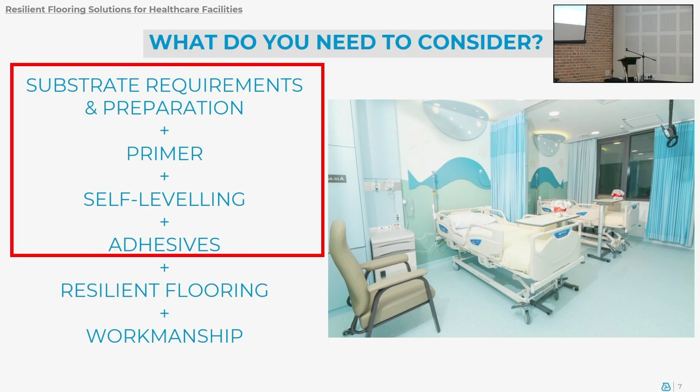Okay, what do we need to consider in order to deliver a sustainable, quality, safe and hygienic flooring system? We need to think about the substrate requirement, the preparation of the substrate, and a suitable primer is also needed - it's very important. The self-leveling compound is not just a layer of cementitious material, it's more than that - we will explain in more detail later in the presentation. And of course the adhesive - I will also spend some time explaining the importance of selecting a suitable adhesive, especially for hospital floors, later on. Finally, we'll talk about the resilient flooring, the vinyl flooring, and also the workmanship. But today's main topic will cover mostly the first four items: the substrate, the leveling compound, the adhesive, and the primer part.

When we talk about hospital floor, the resilient flooring for hospital floor is almost everywhere - it covers corridors, hospital beds, cafeteria, reception area, operation theater, etc. Which means to say, a good, quality, and performant floor is important for us. As I said, the hospital operates 24/7, there's no downtime allowed. If there are any defects or any delamination appearing on the flooring surface, that means we have to shut down that particular area, we have to repair it, and it will also raise concerns of hygiene and safety issues.

Okay, so now we talk about the substrate preparation and also the requirement.

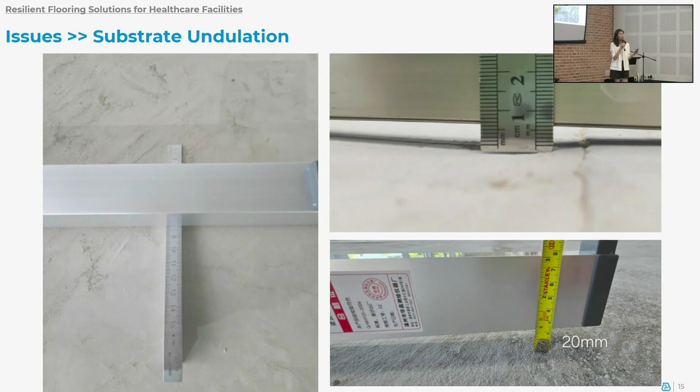Okay, this is the issue that's commonly seen at the job site. I think not only for hospital floors, the undulation of the substrate. Is that common to happen? Common, right? But we actually have a way to improve this issue.

Another issue, a weak substrate. Is that also common at all job sites, architects, consultant job sites? I see it every day. Not only for hospital floors, in some factory jobs, and also in shopping malls, commercial buildings, and it can be residential buildings as well, residential projects.

The third issue: when we apply the leveling compound on different types of substrate, we actually require different types of preparation and a suitable primer. But when we talk about hospital substrate, it's not always concrete substrate. Sometimes for some refurbishment projects, we apply the leveling compound on top of a tile surface. And I have come across some inquiries for hospital projects that actually wanted us to apply the leveling compound on a metal surface. Although this is not very easy or very common to see at the job site, it happens.

We also need to consider that when the substrate type is different, if we never take care about the preparation, never treat the existing substrate, for example tiles, accordingly, and we directly apply the vinyl on top, what will happen? You'll have a telegraphing effect, everything will reflect directly on the floor finishing. It doesn't look good. And it potentially entraps dirt and bacteria in the low spots area. So all these things are also very important for us.

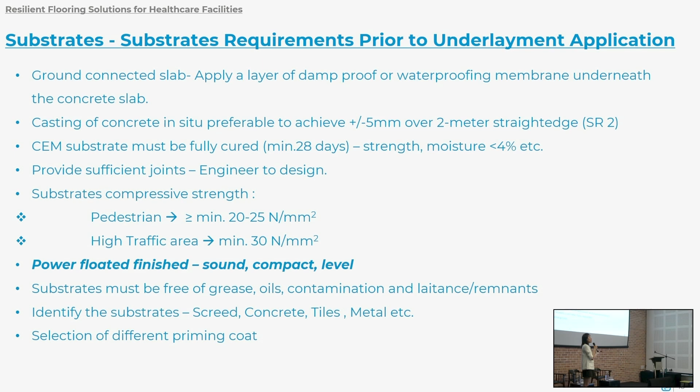And then finally, we need to identify the substrate. It's not always concrete, as I mentioned. Sometimes it can be metal, sometimes it can be tiles. So different types of substrate will need different types of substrate requirements and surface preparation. And of course, when there's a different type of substrate, we need to use different types of primer.

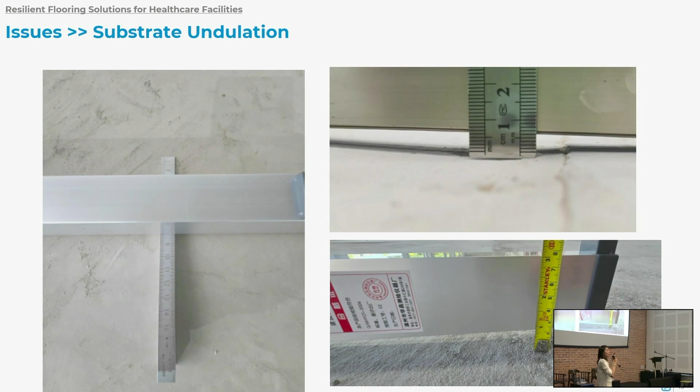So there's a way to rectify this issue. If we already know what this requirement will be, what we need, and it has to be done at the job site in order to deliver a good job. If there's any undulation issue, it can be avoided or improved by specifying the correct floor level. Okay, how about the weak substrate?

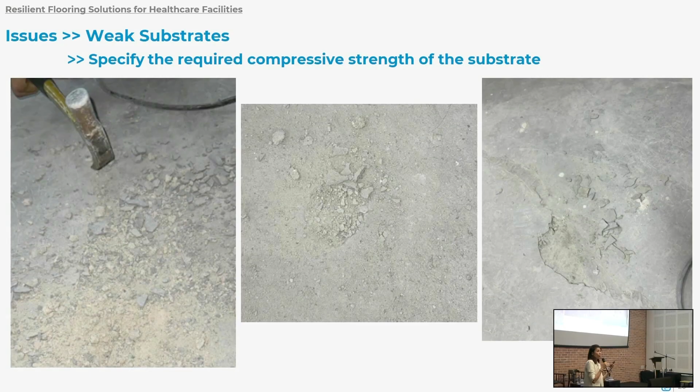Part of it can be workmanship, but I think the most important thing is we need to know the requirement for that hospital floor. Then only we can specify the requirement, the standard accordingly, and the applicator or the main contractor will deliver the job, the finishing, as per our requirement.

Oh, you're very smart, yeah?

It's actually because of the untreated substrate with high moisture content. I will keep repeating this moisture issue in my next few slides, so you have to bear it in mind and remember this. When we say high moisture, it means the moisture content is more than 4%. I will explain why in a later slide.

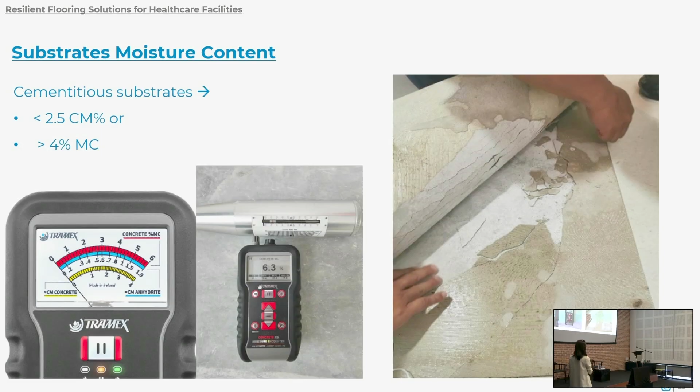This issue can be improved, or the chances of blistering happening at our job site can be reduced, by applying a layer of moisture reduction barrier. This is very important because I've seen a lot of hospital flooring using vinyl flooring on the ground bearing slab, but there's always a missing layer - the most important layer, the moisture reduction barrier.

You imagine, once we already move in, maybe the first week, second week, no issue. But once the moisture pressure accumulates to a certain strength, when it's strong enough to push away the vinyl, we can see this. But by the time you identify this issue, you've already moved in, the hospital is already operating. What we need to do is shut down that particular area, and most of the time we don't have that luxury of time. So this layer is very important, especially for hospitals.

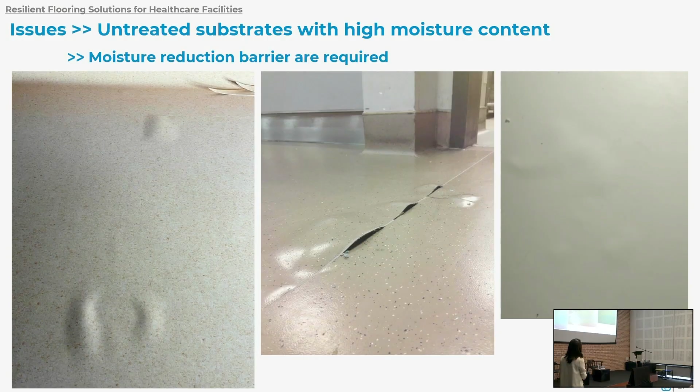Now we move to the leveling compound layer. As I mentioned in the first few slides, the leveling compound layer is more than just a cementitious layer - it's not just a material that resurfaces or improves the undulation of the existing substrate in order to receive the vinyl. There's a lot of things we need to consider when we select or specify a product, because there's a lot of things related to the durability of the flooring system, the hygiene, and also the safety.

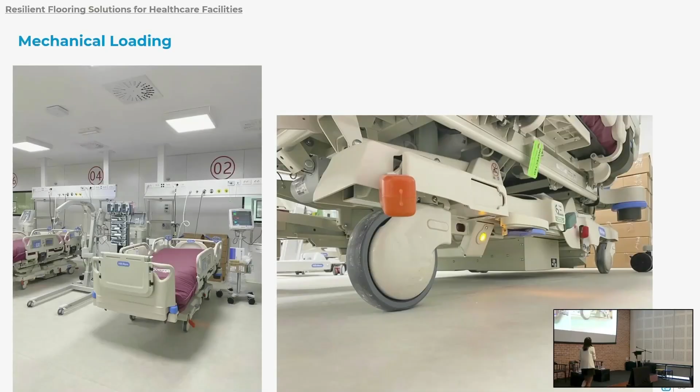This is actually very dangerous, especially for hospital patients and medical staff who always walk on the resilient flooring surface, or when pushing medical equipment over this bumpy area - it can be very dangerous. Also, the hospital bed is always subject to all this mechanical loading.

So these are the criteria we need to consider when selecting an appropriate hospital underlayment material. I'll go through them one by one. The first one is mechanical performance - you have to recognize this logo, compliance with the standard EN 13813. I'll explain more details in the next two slides. Also, we need to consider the thickness.

Sometimes my client will tell me they need a floor that can achieve 5mm, 7mm thickness, or top up the leveling compound to 10mm thickness. So we need to consider that, because for different types of thickness you want to top up, there are different types of leveling compound that need to be used.

Also, the waiting time before laying the flooring - as I said, they are short of time, everything needs to be fast, so you have to consider the waiting time before bonding. For fast track projects, you need a more fast curing material instead of the standard leveling compound. Also, suitability for underfloor heating systems, though this is not common in Malaysia. And fiber reinforcement is also not common at our job sites in Malaysia, but in some European countries they use this when they need to apply a thick layer of underlayment material, so reinforcement material is added to increase the strength of the material.

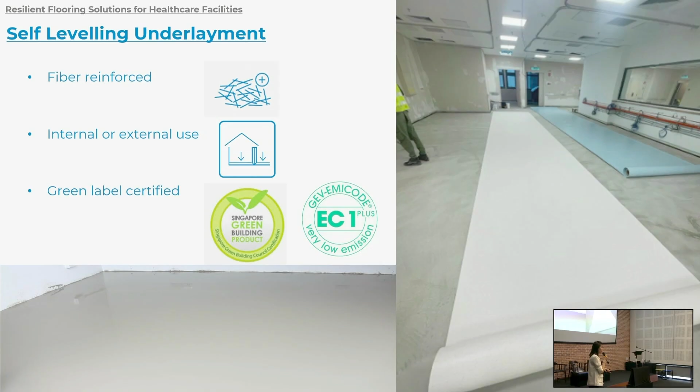So you see, a simple layer of cementitious material actually has a lot of factors we need to consider before selecting the appropriate material to apply at the job site. Now, if you still remember this logo, the standard EN 13813 - this logo is very important for me, as it can become one of the selection criteria when we need to select the suitable self-leveling compound to apply at the job site.

Why? CT - what is CT? CT represents a cementitious material. And here, C25 - can you guess what C25 means?

Yes. Do you have any gift for this very smart person? Joseph, she always answers the right question, yeah.

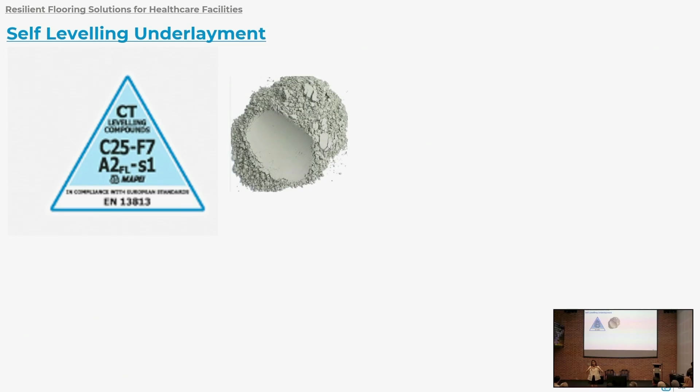C25 means grade 25, okay? And what is F7? Just guess, so that you all won't fall asleep. I know it's very difficult to attend the product talk in the early morning, especially on Saturday. Same goes to me. What is F7? Just guess. Flexural strength. Flexural strength refers to the maximum bending of the material before it breaks. So when I show F7, it means that the flexural strength is 7, okay?

A2. Anyone know, or you only know A4, A4 paper? A2 is actually a fire rating classification. When we say A1, A2 in Euro class, it means this is a non-combustible material. Non-combustible means this material will not burn, it will not spread fire, it won't catch fire as well. Is that important? A non-combustible material to be applied at the hospital floor is very important. Do you have any idea what are the examples of non-combustible material? Cementitious material, concrete, steel, for example, okay?

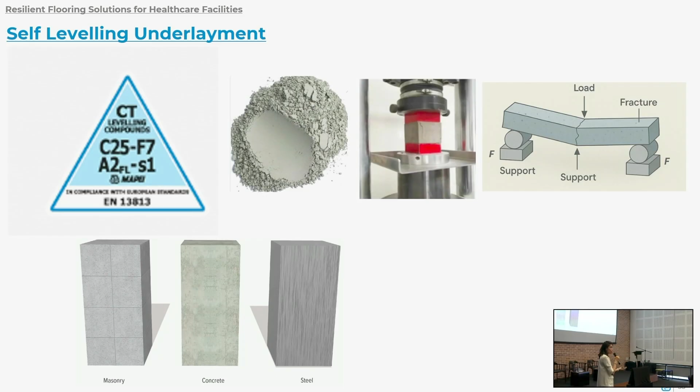FL is referred to the flooring material. S1, when I say this is non-combustible, S1 refers to S for smoke. S1 is referred to low smoke production. This is also very important. I realize that most of the time when we are selecting a material like the leveling compound, we just think it's just a leveling compound, a layer of cement, but it's more than this layer, more than a leveling compound. It gives you a green certification, it gives you strength, it gives you flexural strength, and it is a non-combustible material with very low smoke production.

Okay, so this is about the EN standard 13813. So if all these issues happen that we can see at our job site, it can be improved by using a high mechanical strength self-leveling underlayment material.

Okay, and now we will move to the adhesive layer. Adhesive layer is also something that I think, I have a feeling, maybe I'm wrong, that most of the consultants, the hospital owner, even the hospital operator, are not really concerned about this layer. For them, adhesive is just the adhesive, right? Nothing special, nothing fantastic about this material. The message I would like to pass here today is the adhesive is not just a simple adhesive. There's a lot of things, a lot of selection criteria, a lot of factors that we need to consider.

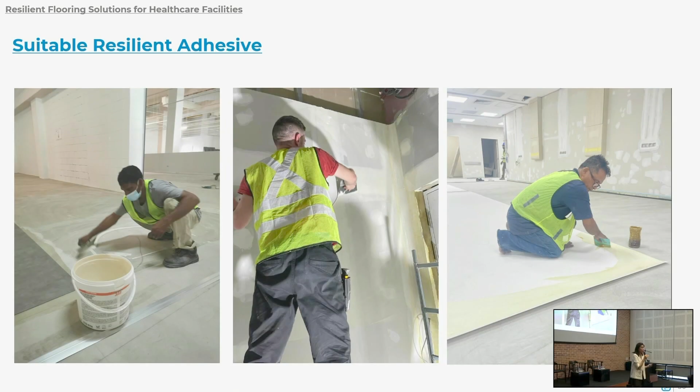In order to ensure that we are providing quality air to the hospital patient, we are providing material that is compliant to a lot of ISO standards. I'm going to explain it later. And also in order to provide a more healthy environment, not only to the patient but also to the medical staff, because they are the ones who always work there, right? Okay.

When we talk about adhesive, as I said, there are three components that I feel are very important. This is the performance test of the adhesive material, that it has to be compliant to the ISO standard 22631. So in terms of these three tests - dimensional stability, peel strength, shear strength - maybe some of the operators or clients feel like this is not related to them. They just need a layer of adhesive that is able to adhere to the substrate, that's it. But there's a lot of things we need to know about this test, then only we know why we need to select adhesive that complies to these three ISO standards.

Okay, the first one is dimensional stability. Dimensional stability for the adhesive material is very, very important. Why? Because a material that is dimensional stability approved, or passes the test, means the adhesive is able to withstand or hold the vinyl in shape without changing shape. This is very related to the job site condition. Imagine the hospital floor, the air conditioning is always turned on, very cold most of the time. But in some areas like windows, corridors, or the entrance area, it will be subjected to sunlight as well, right?

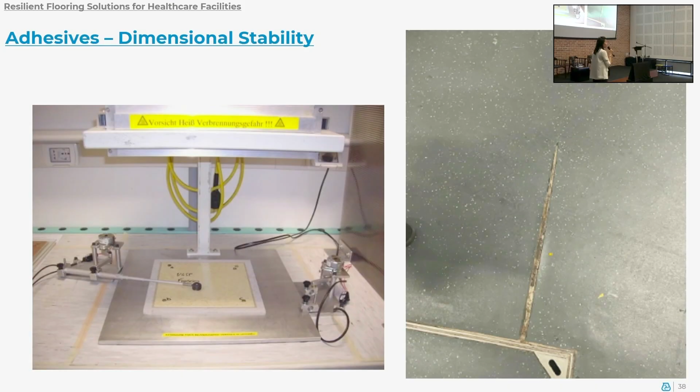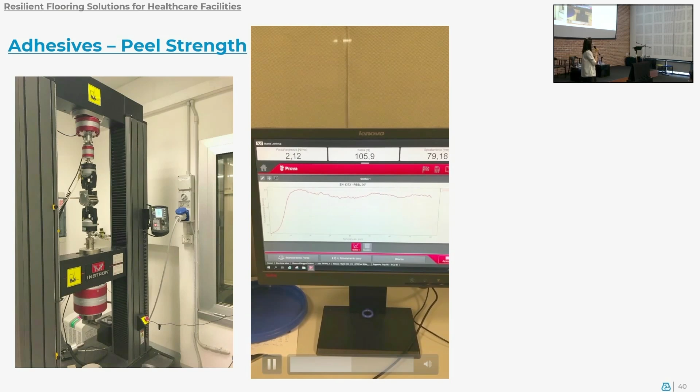The worst case scenario is if the adhesive we are selecting does not pass this test, meaning you see cohesive failure. What is cohesive failure? Cohesive failure is a failure that breaks in between the adhesive itself. This is something very bad, meaning the adhesive is not strong enough.

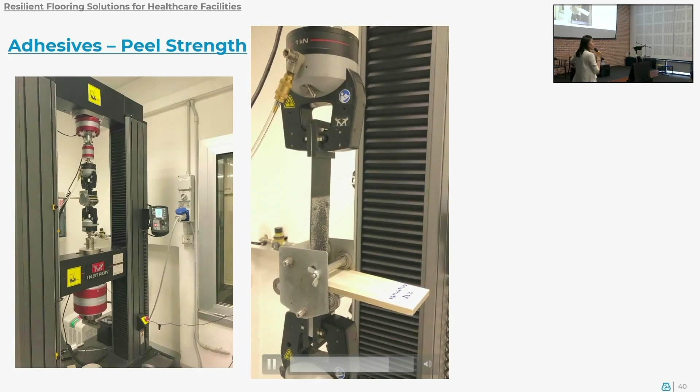So this is how the test is conducted. You see they will pull and they will also measure the maximum tensile force that it is able to take. Is this related to hospital flooring? Related, right?

For example, today when the hospital cleaners are doing cleaning, especially on the edges, that is always the weak point. If there's multiple times of cleaning, pushing, and we have a chance to lift up the material, if the material we are using is not good in terms of peel strength, the edges will potentially curl up. And this is also dangerous because people might trip and fall down on the curled up area.

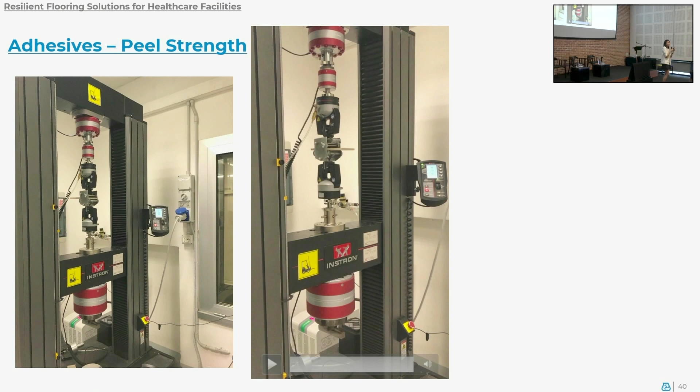Okay, so this is also related to us. And now we move to the last test, which is about shear strength. Shear strength is to actually test the force that the material is able to withstand to hold in a parallel direction, or sideways, meaning front and back or left and right. We call this sideway, and this is also very common to see at hospital flooring.

Imagine today we are pushing hospital equipment. Sometimes they run fast and maybe there's someone in front of them, so they have to stop immediately, pull back and pull out. So front and back, this is because of sideway force. So when the adhesive is not good in terms of shear strength, after multiple times of pulling sideway force...

Potentially, it will give way. Then the vinyl flooring, what will happen if you have a sliding effect? This is actually also very dangerous. Imagine in a hospital, everyone is in a hurry, everything is urgent, they need it fast, they need to settle it fast.

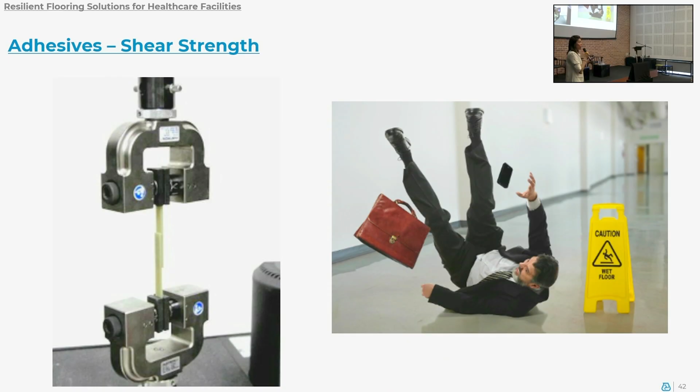So when you are trying to run, the vinyl flooring could already give way and fall down, so it's also very dangerous. Material that actually passes the shear strength test is important as well. This ISO standard is one of the selection criteria for the adhesive, to ensure the performance or mechanical property of the adhesive is there.

Now, from the adhesive layer, we also need to talk about the GBI building - we have an expert here, so I will just cover the product. When we say VOC, this is very important, especially nowadays as we look for more sustainable buildings, and also very important for hospital projects. I will explain the definition of VOC when we talk about VOC emission and VOC content - that's a difference.

Here is the definition of VOC emission. VOC emission is the volatile organic compound that is released by the product into the air. This is measured in the emission chamber, compliant to ISO standard 16000 Parts 3, 6, 9 and EN standard 16516. The measurement unit is microgram per cubic meter, because we are talking about release into the environment - we test everything in the emission chamber.

So when we talk about VOC emission, we always like to relate this to the EC1 Plus standard. This is a European standard, but I think it's important - EMICODE material certified for low emission, EC1 Plus is actually very low emission. Meaning, it doesn't mean totally zero VOC. There's still some VOC content in the environment, in the air, but very, very little. I will show you the table later.

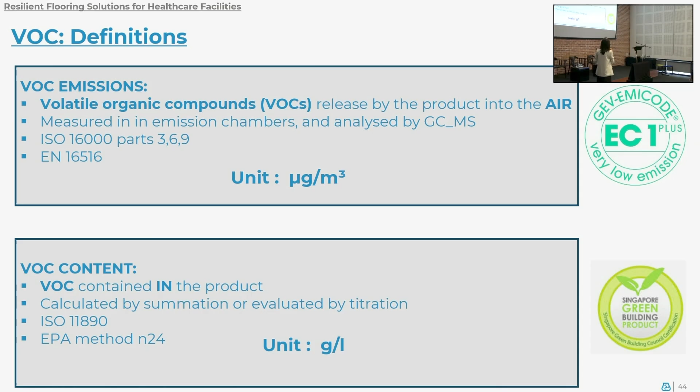Now we move to VOC content. When we talk about VOC content, we're talking about the content inside the product itself. The first one is talking about air quality, the second one talking about VOC inside the product. It's actually evaluated by titration, compliant to ISO and EPA methods. The measurement unit is gram per liter. This is very related to Singapore Green Building Product - one of the testing criteria for Singapore Green Building Product is about the VOC content inside the product itself.

Now we talk about the VOC emission comparison. Why do I need to show this table? Because I feel like I don't know whether all the architects here realize that at the job site, hospital job site, a lot of applicators use solvented adhesive. A lot of time when we visited the job site, it immediately gives a very strong smell, even when they are applying vinyl flooring material - they still use solvent material.

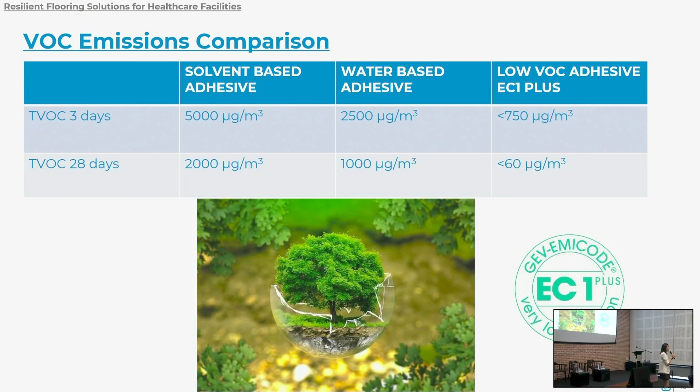We can show you the test report normally, because if the manufacturer is able to show you that their adhesive complies to this test, they need to show the test report as well. So we have to always identify this logo, not the Singapore Green Building material, but this EC1 Plus import logo. I realize that sometimes when we try to show this test certificate to the consultant, they are not too interested when I mention about this. But in fact, the VOC emission in the air is very important, so I think we have to always think about this certification.

No, it's a European standard. But for some manufacturers, they not only send the product for the EC1 Plus test, they also send the product for green certification. So we have both, which I think will be even safer for the hospital project, right?

To which ISO? I think Malaysia standard, right? Based on what we have dealt with the architect in the past, they prefer to have a Singapore green label as compared to the EC1 Plus standard.

To the green, right? SIRIM is totally not related to green, because for SIRIM cert, normally what we do is send the product for performance test. It can be a lot, for example leveling compound - it can be compressive strength for the first 28 days. So it is not related to green, yeah.

I'm not sure, I think we can check with the expert later, the next speaker. I'm not a certified person to talk about this topic, sorry, but we can discuss later if you have any input from the next speaker, yeah?

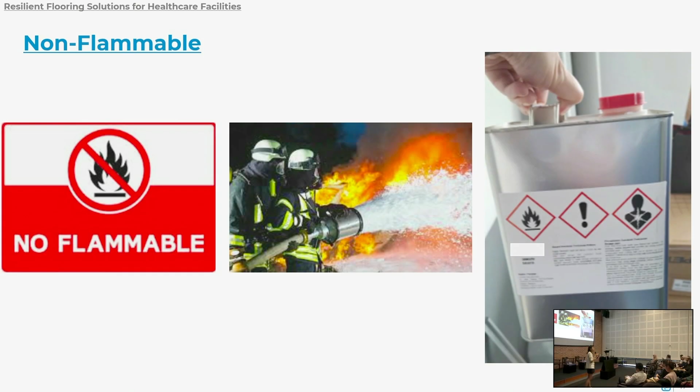Okay, so I'm coming to my conclusion. I think I'm on time, a bit earlier. There are 4 key factors for a more hygienic, durable, safe hospital floor. For me, there are 4 key important factors. The first factor is the substrate condition. As I mentioned, substrate is everything, the foundation of everything. So we need to make sure we specify the correct material at the job site, the correct specification, then only the applicator or main contractor is able to deliver as per the requirement.

And the environment factor I'm actually referring to is not only a low VOC emission environment, because we need a very hygienic and very safe environment. I also refer to the job site condition. For example, today, if we need to construct a clinic, not to say a hospital, at Genting Highland.

So at Genting Highland, all of us know that the relative humidity is very high. In that kind of situation, the curing duration of the leveling compound will be much slower. But do we need to rush to complete the project? My answer is no.

Because today we always talk about hygienic, durable, and safe hospital flooring, we still need to allow the proper curing duration for the leveling compound or the concrete substrate in order to allow the material to achieve the ultimate strength, then only we can proceed to the next layer. So if there's an environment factor that's hard for us to control, I know, but we're not supposed to be in a hurry to complete the project without considering a durable and more sustainable flooring system, okay?

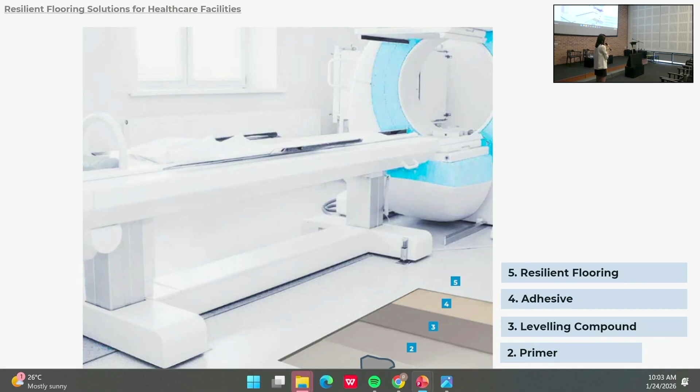Okay, we talk about the repair method. There's some issues commonly seen at the job site, like cracks - cracks less than 0.3mm, and surface cracks within 0.3 to 1mm. All this can be repaired using this product called Planiprep SC. This is a product that can repair from feather edge to maximum 5mm, pre-packed in 5kg or 4.5kg per bag, so very easy to carry and bring to the job site.

But the message here is not just the product. The message is if we are able to identify any defects on the floor substrate, we need to repair it accordingly. It's very common that they don't have this practice at the job site, but all this imperfection on the substrate will definitely reflect into the leveling compound layer, and finally it will appear on the vinyl flooring layer.

Okay, this is about crack. And low spot, also common, right? We also can repair it using the same product called Planiprep SC - anything less than 5mm until feather edge. Feather edge means almost without thickness, scratch to zero. We still can use this product to repair it accordingly.

And if you are able to identify some localized repair that's in between 5mm to 10mm thickness, very common also, we can use a patch repair mortar called Mapegrout Patch 218. This is a fiber reinforcement patch repair mortar, a very thixotropic material, okay?

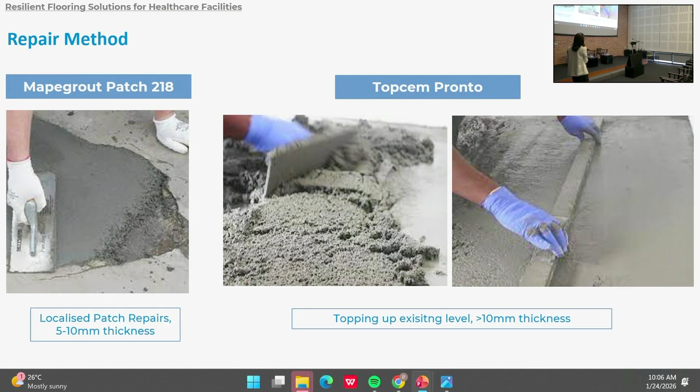But in some cases, we talk about different types of substrate, right? We need to use different primer. If today we are dealing with a substrate that's a tile surface, we cannot use Primer G anymore because Primer G is a one component resin-based primer, only can be applied on all cementitious substrate. If today we have to deal with tile finishing, what we need to do is use a more high performance primer - I would like to introduce this primer, which is a universal acrylic primer for all absorbent and non-absorbent substrate.

So one example for non-absorbent substrate would be tiles. So normally what we recommend for tile surface, you still need to dry it, because some tiles we have seen at the site have a layer of very glossy, oily surface. We cannot apply the primer on that kind of finishing - we have to remove it using a grinding method, or you can use caustic acid to actually remove the glossy and oily surface.

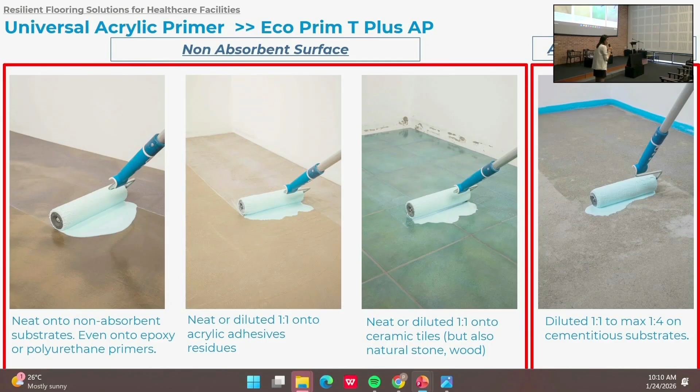When I talk about this universal primer EcoPrim T Plus AP, why do we call it a universal primer? Because it can be applied on all non-absorbent substrates. It can be applied on existing epoxy or polyurethane primer - on that surface it can become a primer. It can also be applied on existing acrylic adhesive residue - this is common for renovation work. And it can also be applied on ceramic tiles and stone surfaces. So all this we call non-absorbent surface. It can also be applied on absorbent substrate as well, such as normal cementitious substrate. That's why we call this a universal primer.

Now we move to moisture. If the substrate moisture is more than 4%, we need to apply a layer of moisture reduction barrier, and this is the suitable product. The product name is called Planiseal VS MY. This is a 2-component solvent-free epoxy, 100% solid content. The material viscosity is very good, meaning it is able to penetrate into the concrete substrate very well.

This will be the layering - typically we require 2 layers. The first layer is very important because at 0.4 kg per meter square, it will act as a moisture reduction barrier. Anything we apply cannot be lesser than 0.4 - it has to be minimum 0.4. The second layer is actually a bonding layer in order to allow the leveling compound to be bonded on top of this material.

This is how we conducted the test for this moisture reduction barrier, and this is an important test as well, compliant to the standard ASTM E96. This is a standard test method for water vapor transmission of material. Why is this test important?

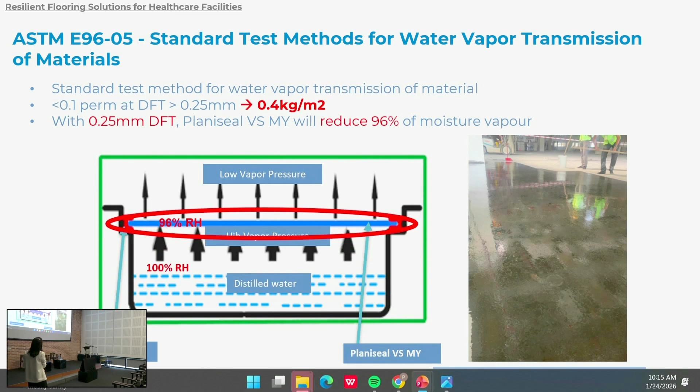Okay, and we come to the self-leveling underlayment. For hospital flooring, I will always propose Ultraplan Contract. Reason being, this is a very high compressive strength material. After 28 days, we can achieve 32 Newton. And this is also a product that complies to the standard EN 13813.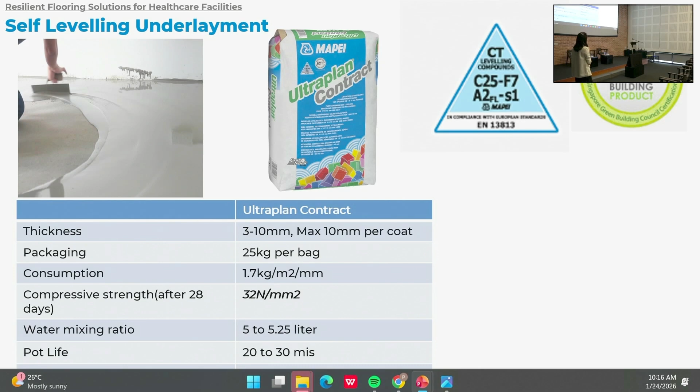I don't want to explain everything in detail since it was already presented earlier. This is also a product certified by Singapore Green Building Product, and of course compliant to EMICODE EC1+, which is the low VOC emission standard. And finally there's the serum test. So this is about the leveling compound.

And we talked about the adhesive. As I said, in the market or at the job site, even for hospital projects, we always see a lot of solvent-based adhesive being used, and sometimes also alkaline-based adhesive.

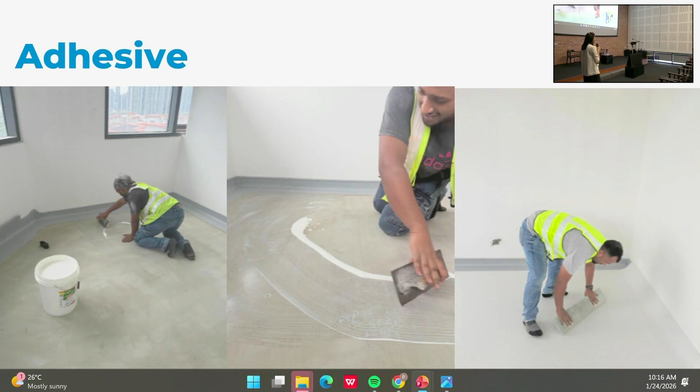So the adhesive I'm going to introduce is Ultra Bond Eco V4 Universal. This is also a universal adhesive. When I say universal, it has multiple usages. The universal meaning, other than referring to the high performance of the material, also refers to the application of this adhesive, meaning it can apply to all types of vinyl flooring - vinyl roll, vinyl plank, rubber flooring, linoleum, etc.

The important tests I mentioned - dimensional stability, peel strength test, shear strength test - all pass. We have extended open time and fast initial tack, which benefits the worker because they have more adjustment time. There are also two different packagings, and it's ready for use after a minimum of 24 to 48 hours.

This is a product that is solvent-free, low odor, and also very low emission, compliant to the EC1 plus standard for low VOC emission. It's also certified for Singapore Green Building Product, and of course non-flammable. There's also the serum test. So this is the universal adhesive that I refer to.

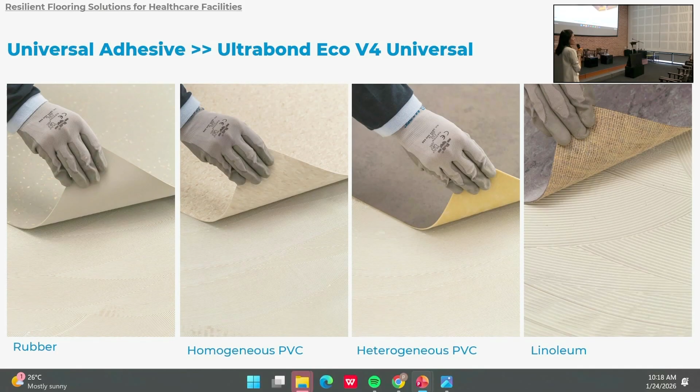As I said, it can be used to bond rubber, homogeneous PVC, heterogeneous PVC, linoleum, and all the vinyl flooring, resilient flooring you can think of. So yeah, this is about the application of the universal adhesive at the hospital job site.

I have a project here that I would like to share. It's a case study about Sunway Medical Hospital. It might be a project some of the architects attending today's presentation are familiar with. Sunway Medical Hospital is one of the very famous, very well-known hospitals in Malaysia.

Actually, not only in Malaysia - they also attract a lot of medical tourism, with people coming to Malaysia for treatment or healthcare screening because of the very good facilities, and there are many Sunway hospitals in Malaysia, not only in Kuala Lumpur. This is the #1 hospital in Malaysia, and we started our project with Sunway Medical Group - our first project, Sunway Medical in Sunway City.

So I remember we started this project right after COVID time, because of the shortage in hospital beds - even now, not just a few years back, there's still a lot of shortage. So they extended the existing building with another tower, Tower D and E. That was back in 2023.

Okay, that's the first project that we started with Sunway, and during that time we were only able to supply our primer and the leveling compound, Ultraplan contract only. But in the later part, we also explored more with this client, and they also used the same system for the Penang project, Sunway Hospital Penang, because they had a good experience with us for this Sunway City project.

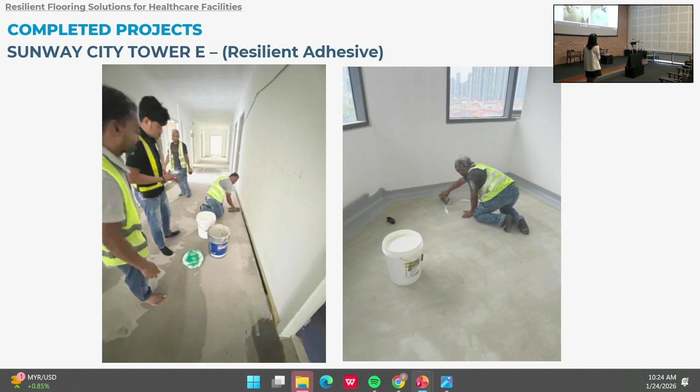Okay, and what we also did, we also tried to propose our resilient adhesive into the same project, Tower E. So this is basically a low VOC EC1 plus adhesive called Ultra Bond Eco V4 Universal.

Okay, so some project references just to show here. Sunway Velocity, we have Penang, we have Damansara, Perak, a lot of nice photos. But I think today what we're concerned with is not the nice photo, not the nice finishing of the flooring material. We are more concerned about the performance of the flooring system, because everything needs to tie back to the durability of the flooring system. It has to be hygienic enough to allow the patient or medical staff to work on top, and it has to be safe for everyone.

In order to provide a complete system and a more durable system solution, our solution will always be a complete system from the primer, the repair, the moisture reduction barrier, Ultra Plan contract, the leveling compound, and also the universal adhesive until the final floor finishing.

Our solution is not only for healthcare facilities. For commercial projects or office areas, we also have a complete system solution, starting from the primer, the repair, the screeding layer, the fast curing screed, the universal primer EcoPrim T Plus AP, the high performance self-leveling compound Ultra Plan. This is Ultra Bond Eco TXAU, a carpet tackifier, followed finally by the carpet tiles. So everything is important, every layer is very important in order to ensure we have a good floor finishing.

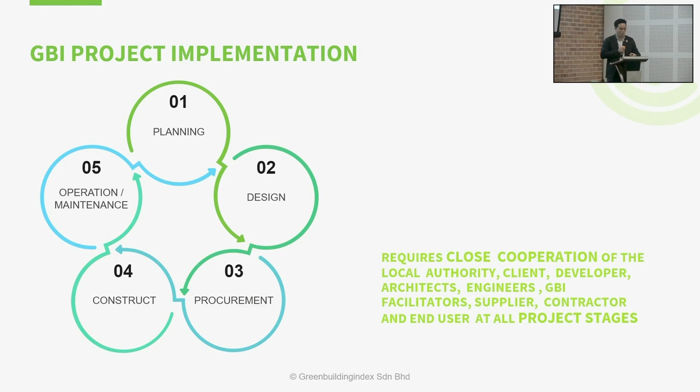Meaning that once you get the CVA, the Certificate of Verification for the building, it needs to be recertified every 3 years. So you have to go through an audit process, and this forces the building owner and facility manager to look into how to maintain their building to the standard of the rating they have gained. So let's say you gain a platinum rating under GBI, you have to work very hard to maintain that rating for the next audit when they go for the RVA after 3 years.

So when we developed this tool, it's developed with the Ministry of Health, and under the Ministry of Health there's Healthcare Technical Services, and together with ACEM, our Association of Consulting Engineers Malaysia, and PAM, these two organizations are the owners of the Green Building Index. We have developed various tools, and the hospital tool is one of them, which we have developed with the Ministry of Health.

As PAM members, your feedback is valuable. So if you are doing a hospital project and you feel that the tool needs to be updated, or there are things that you would like to feedback to GBI, we are willing to take your feedback and see how we can improve the tool together.

Last Friday, I attended a meeting with the developers of the NRNC tool. This is the main tool in GBI, non-residential new construction, and it's going to be updated soon, but we are looking at how it can benefit the industry as a whole, where you can maintain the carrot aspect of it, but update the tool so that what has previously been the carrot now has become the stick. It's part of the law.

So we are giving points for things which are already in the law. For example, MS 1525 is already codified in the law under your UBBL 2012 and then the recent 2021 amendment. So that shouldn't be something which you get more points for, because it's already the baseline. But we want to encourage a holistic overview or review of the tool so that we can move the industry forward to achieve better standards of buildings.

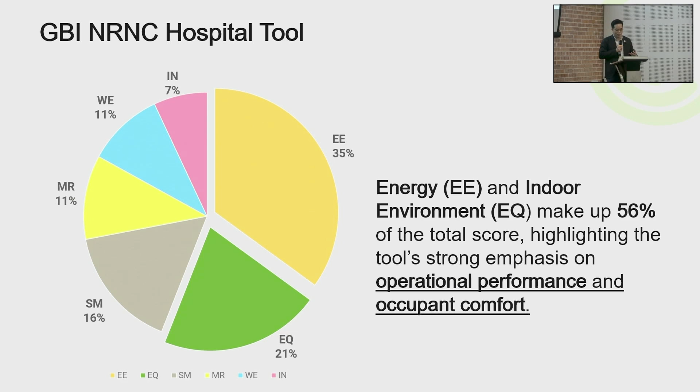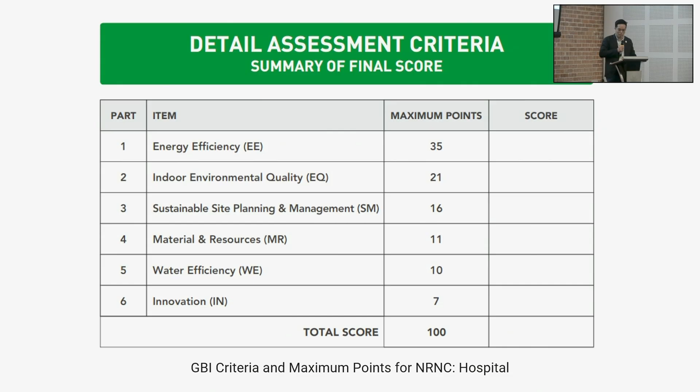This is where you see the criteria in the sheets. You can actually download this from the GBI website and get acquainted with it. The difference here between the NRNC tool for offices, which is the base tool, and the hospital tool is, say, in EE5, for example, there's advanced performance.

For hospitals, they don't operate 9 to 5 like offices do. They actually operate 24 hours. So there is a different criteria for hospitals, where the top tier of the BEI is 90 kilowatt hours per meter per year for the NRNC tool. For the hospital tool, you look at general areas and clinical areas. So the baseline is much higher because of the different operating hours.

Water efficiency for hospitals, we are looking at how you can treat clinical processed water for hemodialysis, for sterilization and things like that, and how the water can be reused from the cooling towers.

So when you look at material resourcing, earlier we had a presentation by MAPEI, so we have a lot of standards with regards to VOCs, how the VOCs are treated in hospitals, so that patients, like immunocompromised patients, do not have to suffer from the odors or the off-gassing of all these materials. So that's a much stricter compliance required for hospitals.

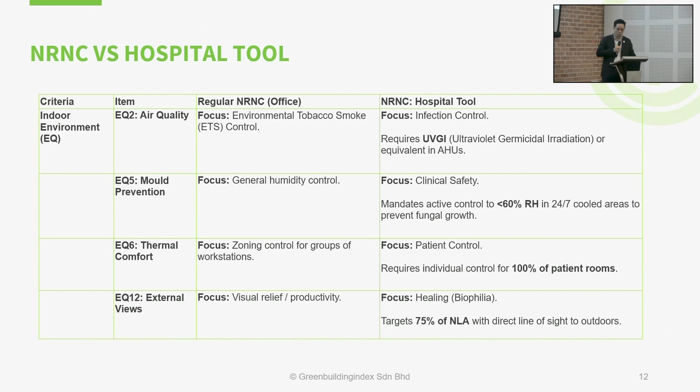So this is the highlight of where the differences lie between the base NRNC tool and the hospital tool. Then we look at this EE5 aspect on energy efficiency.

So now we'll talk about application of the GBI tool, but I'll take off my GBI hat and speak about this as a director of PAB.

Our office, as you all know, PAB has been around for quite a long time, 52 years now. In the last few years, we decided that we want to pursue a mission of creating healthier ecologies, or crafting or designing healthier ecologies, and we want to do this through genuine transdisciplinary design.

I got this term from my wife. She's a speech therapist, and what happened was, when she was studying at UCL, the UK practice is for speech therapists, occupational therapists, and psychologists to go around assessing the patients together, and then they are able to give a very holistic solution to the patient's needs.

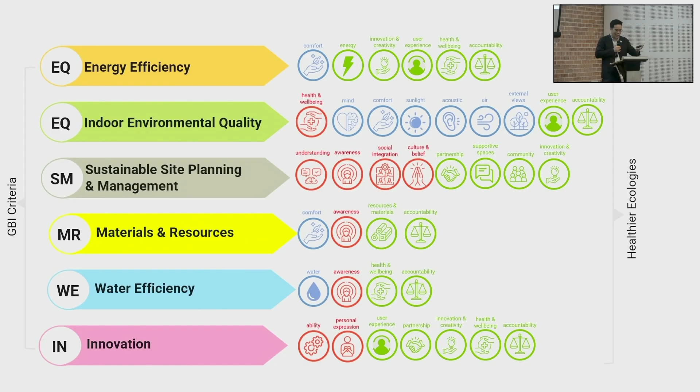So when we chart this against the GBI criteria, you can see this is something which we need to, as all practitioners, look at - how we can design better, create better facilities, and incorporate things which will benefit our clients and the users that actually use the spaces we design.

So GBI, the first GBI Platinum Hospital, the only one at the moment, is Hospital Cyberjaya. This is a public hospital, government hospital, but it was not initiated by the MOH. It was actually something initiated by the MOF through CyberView. Part of the brief requirements was to achieve GBI Platinum at that time.

I think not many were convinced about why we need to go for GBI Platinum, but having gone through the process and after 3 years of operations, I think even the operators whom I met on Wednesday really do appreciate that it was done that way, and the benefits really - they're proud of the hospital and the environment they're working in. So it's paid off in dividends quite a lot after 3 years.

So this was the criteria we used. We scored 86 out of 100 points. As you can see here, not very clear, I'll use the next chart. So the points which we didn't score - I mean, almost all of the energy efficiency points we scored, less of the EQ points, almost all the site and materials, site management points we scored, material resources points, almost all we scored.

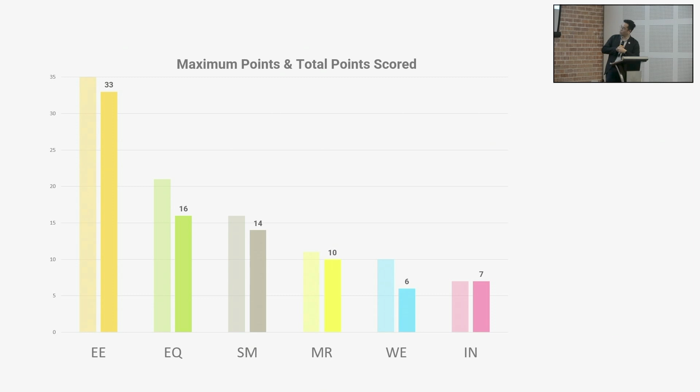Water - because we didn't recycle the water, I mean CK can talk about it later, we didn't recycle parts of the water that's used within the hospital, we didn't score much of this. By innovation, we scored full points.

So when we looked at the hospital design - okay, when you look at the hospital design, we looked at how we can create a memorable and high visual presence for the hospital. So the internal joke in the office is this is the most orange and the most green hospital in Malaysia. This orange is the bright color that was the theme chosen by the KKM.

Healing architecture - we are looking at the complete facilities for a general hospital. It's 288 beds, and it has to be future-centric, so there's room for expansion and adaptability in the future, and also meeting the platinum criteria for GBI.

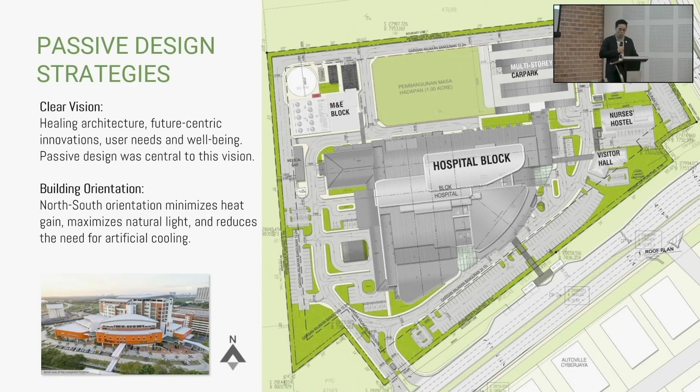So we have to start with passive design first. I think all of you are very familiar with this - having north-south orientation when you're doing the planning, having all the other ancillary facilities planned in a way which supports the hospital in the most efficient manner possible, having the visual presence to the road - the master planning aspects have to be resolved convincingly. And next, you look at how the layout is thought of as different mini blocks within a larger envelope, and then the main area would be the atrium where all the hospital streets will converge.

And then you look at how you can do the roofing with high solar reflectivity. White was chosen as the color, so you reflect most of the sunlight or solar heat gain from the roof. And then looking at how we can optimize the placement and sizing of windows, window to wall ratios, so that you can optimize the performance of the building envelope.

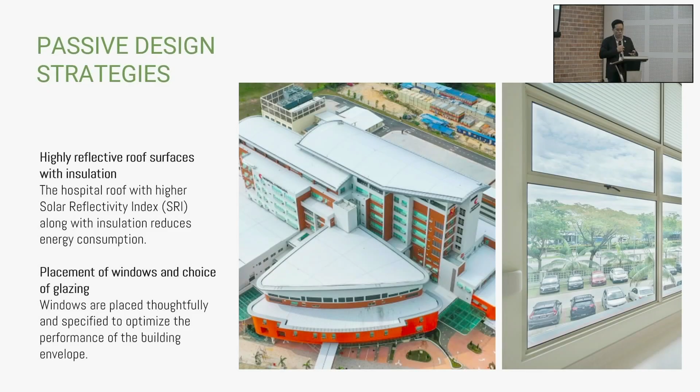So this is the scope of the architect working together with the medical planner to see how we can use this efficiently. As I said earlier about this atrium, it's a very nice space to be in, because it's where all the hospital streets cross, so if you're working or a patient of the hospital, you have to enter through this main area and walk past it many times throughout the day.

This helps with your circadian rhythm, because if you are in an enclosed environment with artificial light over a long period of time, you lose track of whether it's raining outside, whether it's night or day. So this provides a lot of relief to everyone who uses the hospital, and it's not air conditioned. It's naturally ventilated plus cool air spilling out from air conditioned spaces, so it's quite comfortable to be in this space.

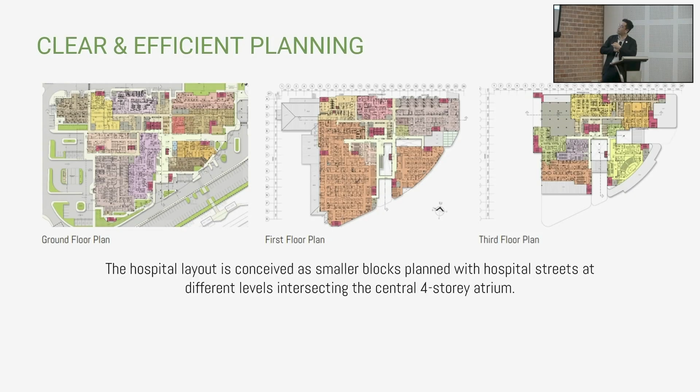Clear and efficient planning - it's a vision where all the circulation converges here. On other floors you can see the bridges across the space, so you have that crisscrossing. And also at the end of corridors, it's not a dark corridor.

At the end of corridors you have a window, some sort of waiting area, a seating area with a view of the outdoors. So it's a short corridor, then you have something at the end with seating. It's very different from most public hospitals we are used to, and it's done in a way that optimizes the planning in exposing patients or users to natural light and views of the outdoors as much as possible, where possible.

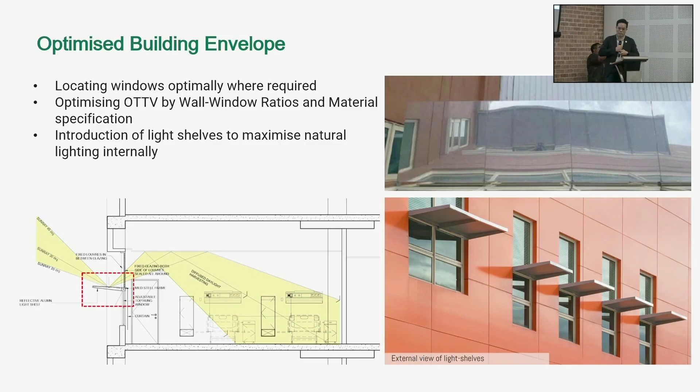Something CK encouraged us to do was test this idea of light shelves, whether or not they work. At first I think we were skeptical, but having implemented the light shelf, there's a mirror surface here - that's the mirrored surface of the light shelf, set at an angle with the window, and what it does is throw the light deep into the space.

You can see here what it looks like - that's the simulation, and here's a photo with the lights off. This is the ward. It's very bright. During the day you don't turn on artificial lighting, so that's one way it gives a better patient environment and also saves on electricity.

Indoor environmental quality, as well as how we thought about color psychology. I think it's very common for hospitals to color code the floors now. This is ID done by us as well, so different areas of the hospital have different colors applied, giving a sense of clarity and identity for each department.

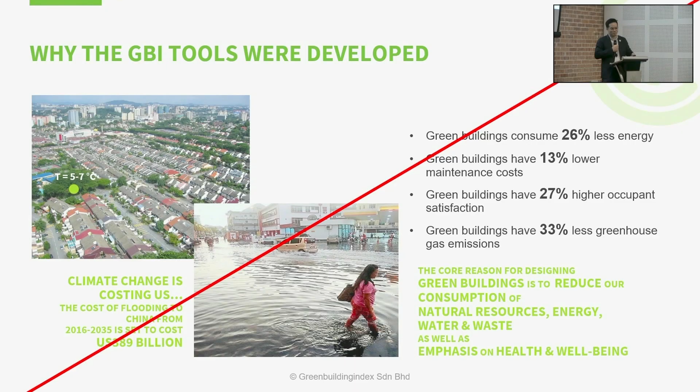So we'll move on to the business case now for hospitals. If you're going to talk to your client about climate change, flooding, natural disasters, and doing good, I think they're not really interested, right? If you talk about saving the planet, they'll tell you, I'm worried about my bottom line. So I think there are 4 key things we want to communicate to our clients.

The first is how a green building would reduce your operational expenses - you can optimize energy, water, and resource use. The second is about staff efficiency - how can you have a happier staff, improve wellness, so staff don't run away and stay with your organization, and don't take sick days. How do you retain good quality talent within the hospital?

Next is about patient outcomes - better recovery rates for patients, and reducing hospital-acquired infections. A lot of hospitals of a certain age and design have a lot of hospital-acquired infections, a lot of horror stories. If you have friends admitted for something quite minor, they end up staying there for a month because of major complications from infections.

And then future-proofing - how can the hospital be future-proof to adapt with technology and have better systems of monitoring? We have AI, we have robots, things like that. So how do you future-proof the hospitals?

When you look at hospitals, after architects deal with the envelope, the next people involved are the M&E engineers, who look at how to make the hospital energy efficient. The biggest contributor to energy consumption is the HVAC air conditioning systems, accounting for 63% of the hospital's electricity consumption. So if you can tackle this big slice of the pie, you can make your hospital very energy efficient, justifying the additional expense of a GBI rated hospital.

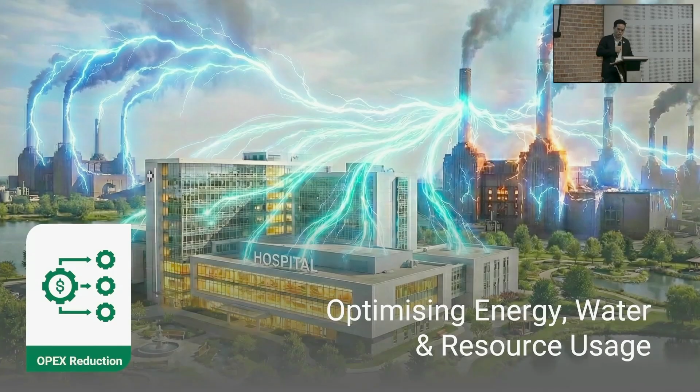So we want to reduce energy consumption through better design of hospitals. This is a real case study where you can take photos of hospitals. Most of our public hospital stock was completed before MS 1525 became law under UBBL 2012 and 2021. So if your hospital was built before 2012, most likely you're in this category where your BEI averages 350, with 384 being the maximum range.

If we're looking at 50,000 square meters, Hospital Cyberjaya is about that size, a 288 bed hospital. A hospital of the same size with a BEI of 384 would pay 7.9 million ringgit in electricity bills per year. Whereas in our design analysis, the BEI we were targeting was 207.

On Wednesday, I went to Cyberjaya Hospital and asked them what their BEI is currently. They said the BEI now is about 228. This is because when we designed the hospital,

we did interaction with MOH, also known as KKM, as well as JKR. So we did all these interactions, and they told us their requirements and where they'd put certain rooms, departmental layout, and things like that.

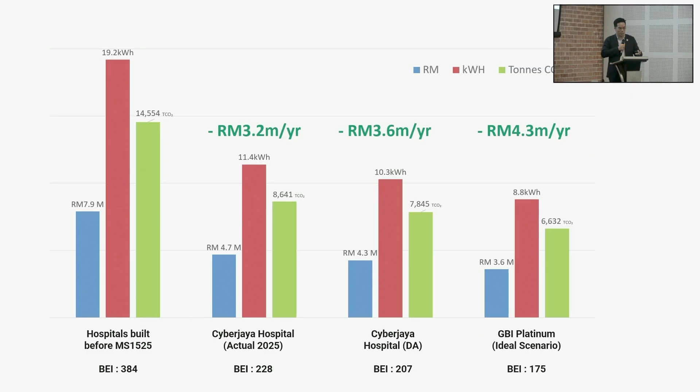You just need the square meterage of the building area, then use Gemini or ChatGPT or whatever it is. You get them to run the numbers based on the published TNB tariff, and you can get this figure.

So what does this mean in illustration? After 30 years, you will have planted this many hectares of forest. That's the kind of carbon output from the electricity savings. Or in the first year of operations, you remove 1,458 cars, so they don't pollute the environment anymore, something like that.

Or a lot of you are going on holidays to Japan in the last few years because the ringgit is strengthening and the yen is weakening, probably. This is equivalent to 708 return trips over 30 years of savings, equivalent to 708 return trips to Tokyo on Malaysian Airlines A350-900, okay?

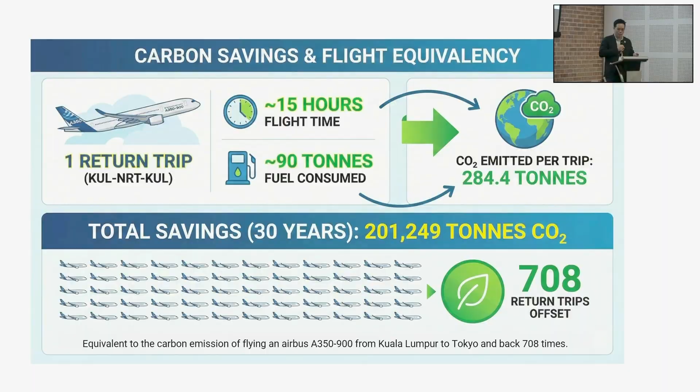You know, the existing building stock that we have for public hospitals, what we have and what is designed at Cyberjaya - you look at access to natural daylight, reducing the need for artificial light, as I mentioned earlier, access to external views, moderating the circadian rhythm of people working there, better layout for infection control and family visits, ability to control the environment for the patients. That's very important, which typical hospitals will not have at the moment.

Then you want to improve spacing between beds, LED for lighting, similar things. So you can see the differences between what is at present and what was done previously. Waiting areas as well, more spacious, better seating, better access to natural light - things like that help patients appreciate the environment better.

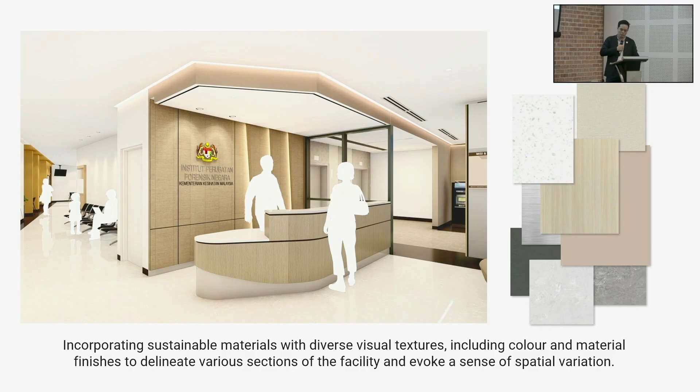So we are recently wrapping up the Institute for Forensic Medicine along Jalan Tun Razak. You can see this golden clad building as part of HKL. We are taking ideas from what we learned from Cyberjaya into the interior design and creating better spaces for the users, also for our private jobs.

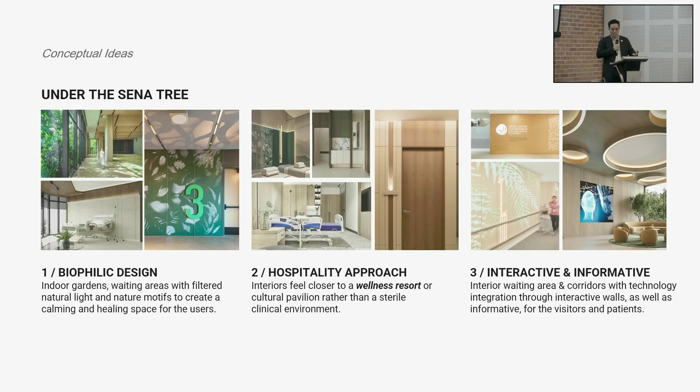This is something we presented to Sena Group for one of the hospitals we are doing now. We are looking at how we can approach biophilic design, approaching hospitals differently, how interiors can be treated, using low VOC materials in the interiors, and then looking at how to incorporate technology better into the interior spaces. So things like this, interior mood boards.

So when we are looking at transdisciplinary design, we're looking at how architects, health facility planners within the same organization, interior designers, landscape architects - how they can inform one another to create better outcomes for our projects. Each of them will give inputs into how hospitals can work better.

Next one is about future proofing. So as you know, this is the design process, the 5 stages. But in GBI, as part of EE9, we require the facility management team to be present 1 to 3 months before the completion of the building. And once this happens...

We are looking at how 50% of the building maintenance team can be on board 1 to 3 months and fully participate in the testing and commissioning of the building services. The next one is about providing a designated building maintenance office that is fully equipped with facilities including tools, instruments, and inventory storage, and to provide evidence of a documented plan for at least 3 years of facility management, maintenance, and preventative maintenance for the building.

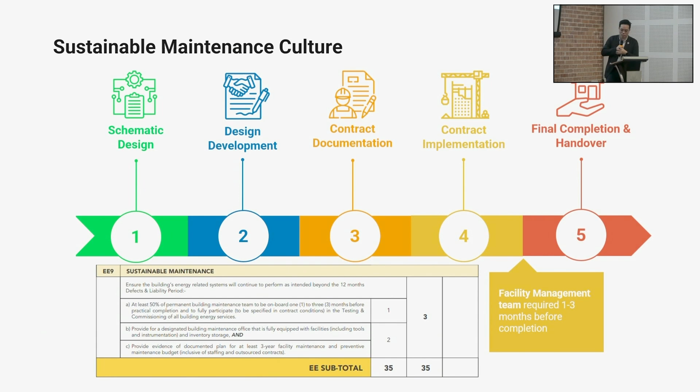This is very important because if they are trying to fudge this, then you know that after 3 years they will probably not get the recertification again. And there's no incentive for them to keep up with the systems or the culture. So it's a cultural shift that needs to occur from the building owners and the operators of the building, the maintenance team as well. So when you embed this into the tool, then it becomes very sustainable in the long run.

So if you allow the building to deteriorate, let's say the building has a 50-year lifespan, you'll see after 10 years you have all this algae growth, roof leaking, and things like that. But if the maintenance team is on board and actively fixing problems as they crop up, you will find that the building can last more than 50 years.

That means there's a budget set aside at the 10th year, right? You have a budget to do major retrofitting works to the building, then the building can continue on for 50 years. But our culture here is not like that, right? We allow the building to deteriorate to very deplorable conditions.

Then we have our minister saying we need URA, we need to tear down all these old buildings. So we have to look at how we can change the mindset and culture. I think the method is probably to have something where every 3 years, like using the GBI tool, you have to do it, or you don't get recertification. Same like some offices doing ISO, every year you need recertification, and there's a major 3-year relook at all your systems. So it's the same cultural mindset that needs to shift.

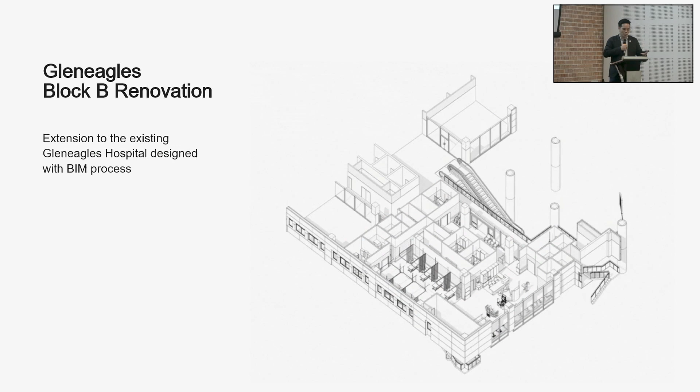Another thing is about BIM. In our office, we have incorporated BIM, and this is Gleneagles Block B that we worked on, completed 10 years ago. We've been asked to come back to do renovation works on the building we designed previously, so we already have the BIM model. Once you have a BIM model, it's very easy to coordinate the long-term maintenance of the building. Eventually you get to do renovations very easily, all the services information is with you, you know where everything is at. You have a model, it's easy to design and fit into the building after completion. So don't neglect this - every organization needs to look at how to incorporate BIM better in our processes. This leads to sustainable income as well, so that you get to go back to do your old job.

Of course, all the hospitals need to be upgraded. Oh, what's happening here? Can I go to the next slide? I think it's stuck. Next slide, okay. We have this in the GBI tool.

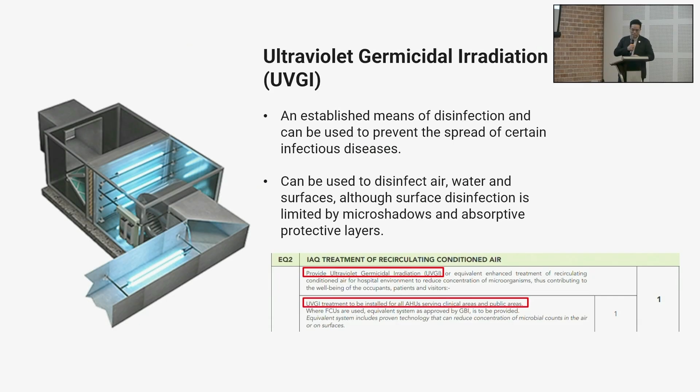This is the UVGI. There's this UV light in an AHU, so the air inside is cleaned by the UV light. It goes through this process, then is transmitted to the rest of the hospital from the AHU. But there's also photocatalytic oxidization units, this PCO, which is widely used in the US, UK, China, and the EU. It's a broad spectrum UV light that activates a titanium dioxide catalyst and generates oxidizing ions, so it's similar to the UVGI system.

You can implement this. They also have sterilization robots, not just in hospitals - if you go to airports you can see some of these robots roaming around, sterilizing spaces. This is something which happens in other countries as well.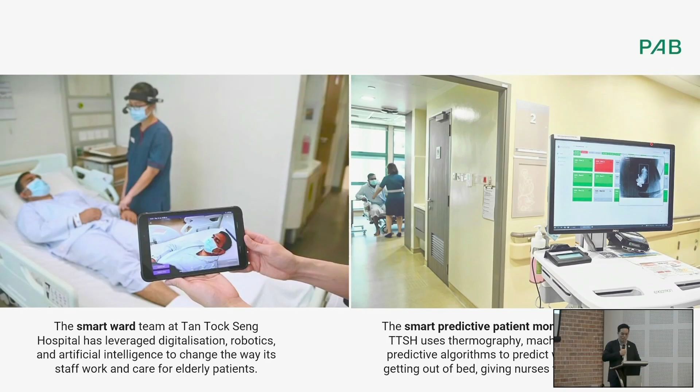In Tan Tock Seng in Singapore, you have digitalization with artificial intelligence for elderly patient care. This predictive patient monitoring system uses thermography, machine learning, and predictive algorithms to predict when the patient is getting out of bed, giving nurses time to intervene. As we progress with hospital design, all these systems will become part and parcel of hospitals, and we have to think about how to integrate them in our design.

This is a TikTok video. Does it play or not? Does it play? Nothing, not working, oh dear. Does it play? Oh, the video doesn't work.

Okay, so in conclusion, these are the things that you benefit from by adopting the GBI tool. Strategic design leads to better patient care, lower OPEX, higher revenues, better talent retention, better results for your patients. And I think all of us have a role to play.

So this story is about the hummingbird - a lot of you know about this story. The hummingbird was taking a droplet of water, trying to put out a fire in the forest. All the other animals asked the hummingbird, 'What do you think you're doing?' The hummingbird said, 'I'm doing what I can.' It has a small beak and it's trying to put out a fire.

There was a presenter who came to PAM last year, and I got this slide from them. It says that architects have 196 times more power to cut carbon through their work than through their lifestyle.

What this means is you can choose to be green. You can buy a green car, have an EV, put solar panels on your roof, eat healthy, plant your own vegetables, whatever it is you want to do to reduce your carbon footprint. It doesn't matter as much as what you do as architects.

So let's talk about Cyberjaya right now. It's a GBI Platinum building. Efficiency is the biggest thing. We really try to push energy efficiency in this building.

Before we talk about this space being used for blood donation - when Alam Bena proposed this space to be naturally ventilated, we got so much pushback from MOH. They said it must be air conditioned. We ran simulation studies and kept trying to convince them it would be comfortable.

There will be leakages because at hospitals there's a lot of fresh air requirement, so it cools all the air conditioned spaces down and expels out this air. If we design it right, we trap this cooling and that space is good enough - you don't need active air conditioning in there. It took us a lot of convincing.

Today people are using it, packed with people to do their blood donations. Now it works - so you need to look into the way to make it work.

We use quite a lot of daylight in here. Daylight is actually cooler than electrical lights for the same amount of brightness. But you don't give it too much daylight - if your entire roof is too much daylight, it becomes a greenhouse. So we just need the right amount of light.

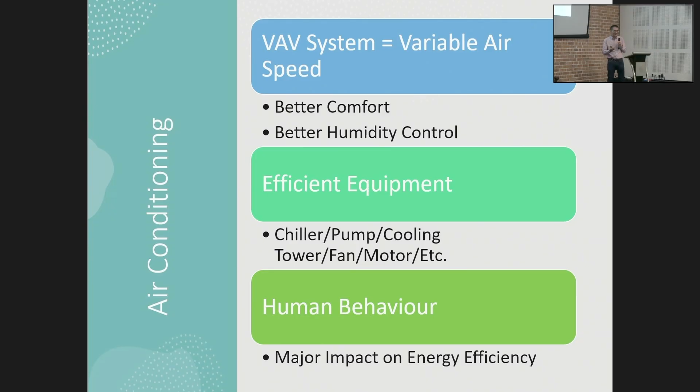And then the last thing is that, as David has mentioned, human behavior has a major impact on energy efficiency. One person working, and the entire floor air conditioning is on. So how do we deal with this? These are the things we had very early discussion with MOH about all the time, but sometimes the information they give back to us is not accurate, so these are things that can go wrong.

So thermal comfort is actually 6 parameters. When we talk about thermal comfort, everybody thinks it's just the air temperature, right? We talk about, oh, it's 23 degrees. But it's actually more than that. If your airspeed is high, blowing across your skin, you feel colder at a higher temperature. And then the third parameter is mean radiant temperature.

What is mean radiant temperature? The best way to describe it is if you look at the temperature on your weather forecast on your phone, it says now it's 28. But I dare you to step outside in the sun — you feel more than 28 degrees, right? What's happening is that's the radiant temperature from the sun towards you. It feels like it's 37, 39 degrees, when you're standing underneath the sun, although the air temperature is 28. It's the same thing — if you go to Genting and stand out in the sun, you also feel this heat from the radiant heat. Then because the air temperature is cooler, it's a balance.

So thermal comfort is a balance of your heat rejection with your surrounding. If heat is removed too fast from you, you find that you're cold. If heat is removed too slow, you're getting more heat than you're rejecting, you feel hot. So it's a balance. To balance it, these are the 6 things that actually balance it: the air temperature, the airspeed, the mean radiant temperature. Mean radiant temperature, in a way, is all the surface temperature surrounding you — this is the average of the surface temperature.

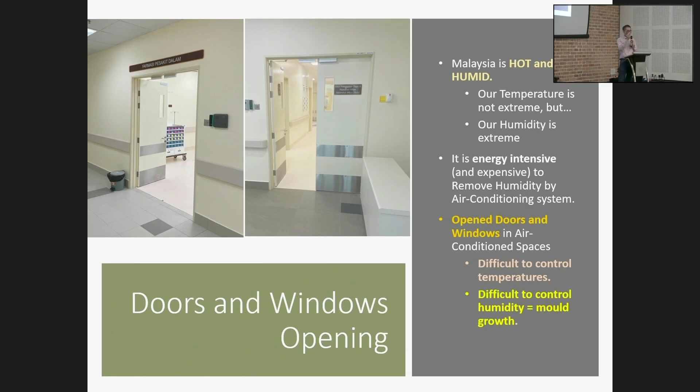So, big issues there. Medical equipment — this one has to do with the first law of thermodynamics, which is that energy cannot be destroyed.

This means that any energy you use, like the TV, all the energy used will end up as heat in the room. The more lights you use, the more equipment you keep running, it all ends up as heat, and then your air conditioning needs to remove it. So it taxes you twice — first time you use the energy, the second time to remove it. So it is an issue.

Sterilizer use also actually uses up a lot of energy, so those are the things we need to address. We need to make sure they actually switch off when they're not using the critical ones — they can be switched off.

If they keep it running, it adds up to your energy efficiency or energy use. So we keep having to have this reminder everywhere.

Lights as well, because the building is designed for daylight. Daylight is cooler, and we designed the building together with Alam Bena to make sure there's a lot of daylight in the hospital, because it has been shown that people with access to daylight actually recover 3 days faster. Those who don't have access to daylight are slower to recover.

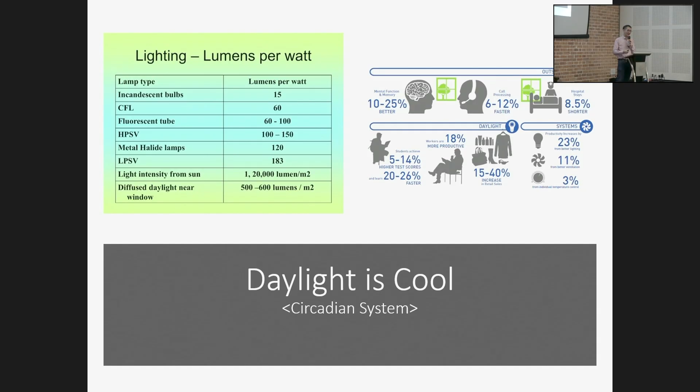But more important than that is actually glare as well. I'll show you a little bit about the glare afterward.

Talking about the benefit of daylight and glare, the top part of the window here has glare prevention louvers, so that people lying down here, when they look outside, are not seeing the sky.

Of course direct sun is most glary. In temperate climate countries it's blue skies when not direct sun, and blue skies are not glary. Malaysia is cloudy, and our skies are glary, so we cannot have them look at the sky.

So by doing that, you can see the end result more clearly - you have the daylight without the glare.

This is what makes daylight work in Malaysia. So you have to address glare first - your number one priority is to cut off the glare, then the daylight will work.

If you don't cut off the glare, what will happen? 20 years ago, when I started talking about daylighting and daylight harvesting, what I noticed in older office buildings is that they put posters up - even Maradona posters - to block off the glare.

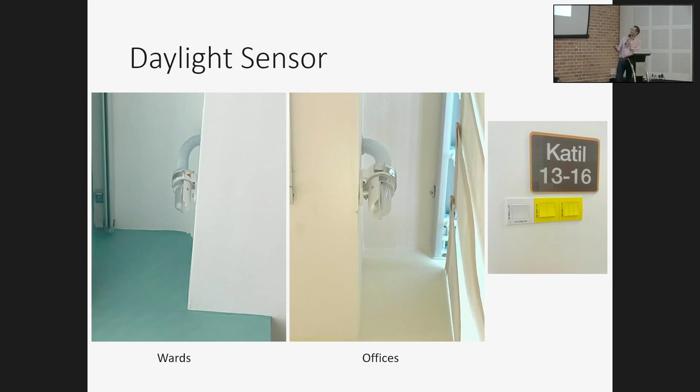But then we have this option here - if the doctors feel they need a little bit more light than what the daylight can provide, they can still turn it on. So we provide that option.

Lighting control - skip through that. Jump through. Okay, the car park.

When we implemented this, the fluorescent tube light - it's no longer fluorescent light, it's LED these days, and it comes with a motion sensor. So we would turn it off, or dim it when nobody's walking, and when you walk past it actually brightens up. So that's the type.

We just did this for my condo that I live in. The additional cost was 2 ringgit per tube out of 30 ringgit. So we paid about 32 ringgit per tube instead of 30 ringgit without the motion sensor. The additional cost is nothing these days.

And the one I've selected for the condo very recently, last year, was Megaman. It has an operating hours rating of 50,000. Normal fluorescent tubes have operating hours of 12,000 to 20,000. 50,000 is almost 2 to 3 times longer operating time.

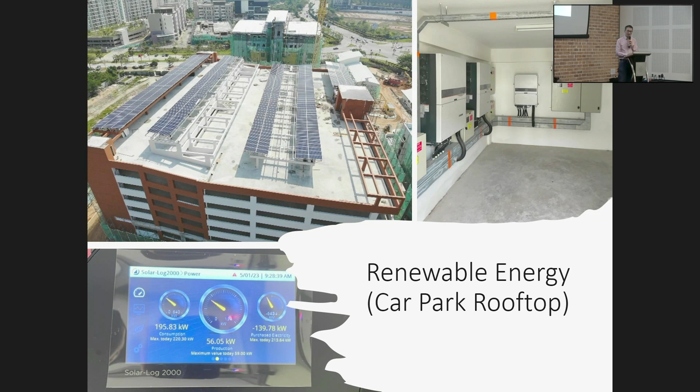Then we talk about indoor air quality - this hospital provides UVGI, which I talked about already. Let's skip that.

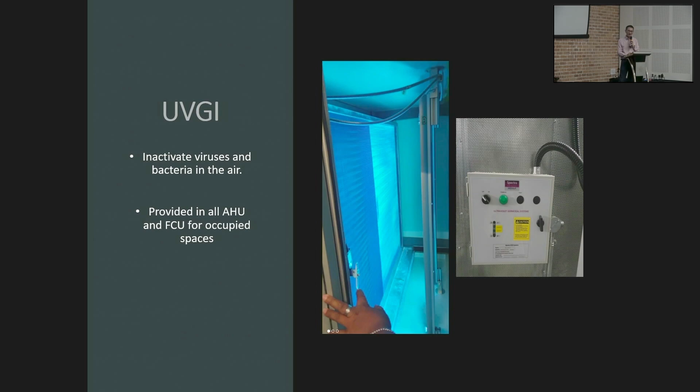VOC, you heard a lot about that already this morning. So low VOC is important, especially for a hospital, right? You don't want the smell. And this smell, if you're exposed to it for a long time, is shown to increase the risk of cancer.

Talking about sustainable site: urban heat island reduction with a white roof. We had a hard time convincing MOH that we need a white roof. They like strong colors. But a white roof reduces the urban heat island and makes sure the surrounding is actually cooler.

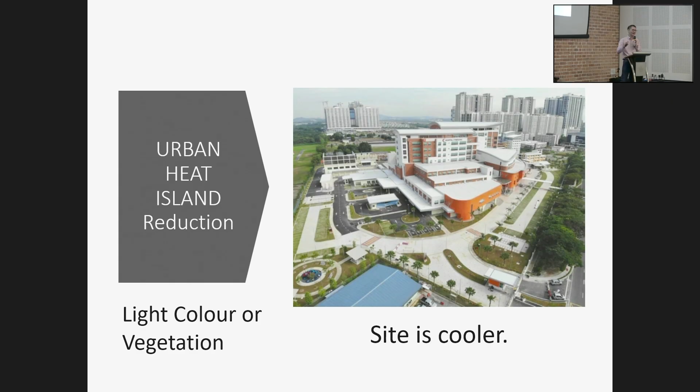Green car park priorities. These days I wonder if we still need it, because EV cars are getting more prevalent right now. But again, in 2017 the tool said we should have green car parks. So right now, probably more important than green car parks are charging stations. We should insist on more charging stations — that may be the way forward.

For material and resources, we try to have very high recycled content. We targeted and achieved more than 35% recycled content in the cement, the steel bars, and all these things in building it. Regional content means the building is made from materials sourced regionally. We can score this quite easily because Malaysian cement, stone, and steel are all regionally sourced, so we got 60% on this project.

Sustainable timber — the doors were certified wood. Certified wood means the wood is harvested from forests that are regrown again. There's a system to make sure it's not just harvested and they run away; they will regrow it back, so it's a sustainable forest. Recycling bins are provided. Green refrigerants, you can skip through that.

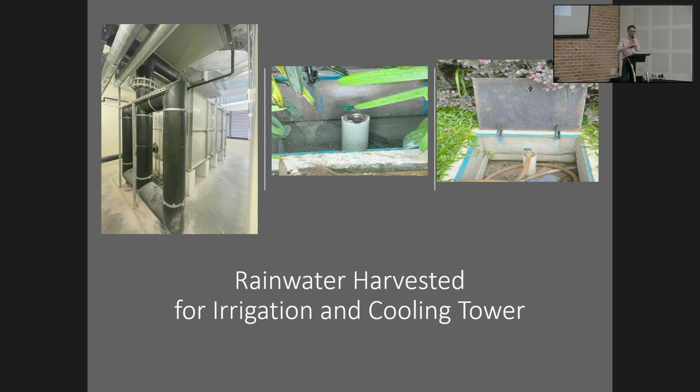For water efficiency, we actually use rainwater for irrigation and the cooling tower — the cooling tower uses all the water from rainwater harvesting, so there's nothing much left. Water efficient fittings are used where it's not critical, but where it's critical, like for the OT, we still use the standard flow rate for the doctors. We also have metering and leakage detection, so when there's high water use during hours it's not supposed to be high, we get alerted.

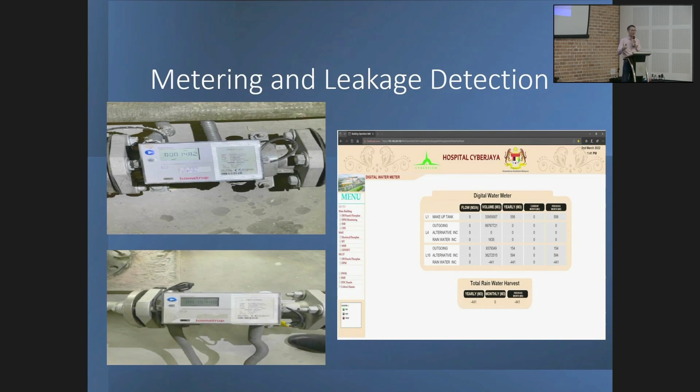In terms of contribution, we achieved 50% energy reduction. Water reduction is only a little, about 5%, not that much for this hospital. Construction waste to landfill we reduced by 83%. So that's it — we're looking at energy efficiency, water efficiency, high indoor environmental quality, and high recycled and regional content in this hospital. Thank you.